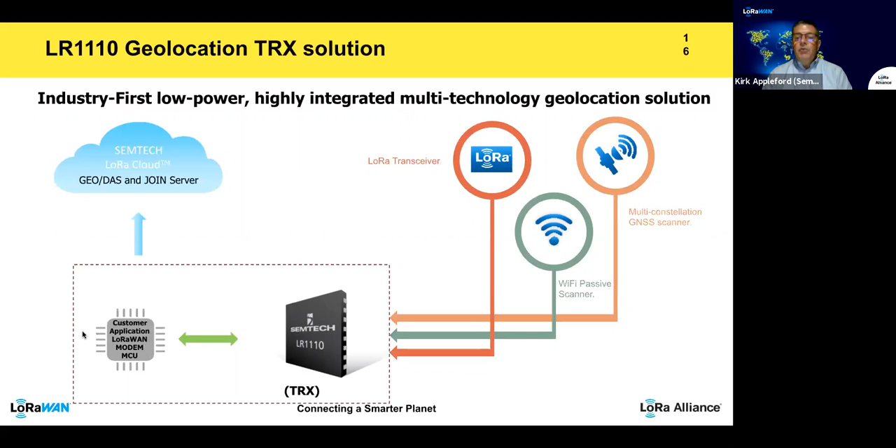So for those of you familiar with large acre cereal farming, where you're using field computers and guidance out in the fields, a lot of you could be using what we call RTK technology, where you're receiving satellite GNSS signals, and then you're also receiving terrestrial GNSS correction signals. So you need a powerful local computer in order to be computing your position in real time all the time. That's really where the power consumption comes from. That's what we've endeavored to solve by moving all the calculations to the cloud.

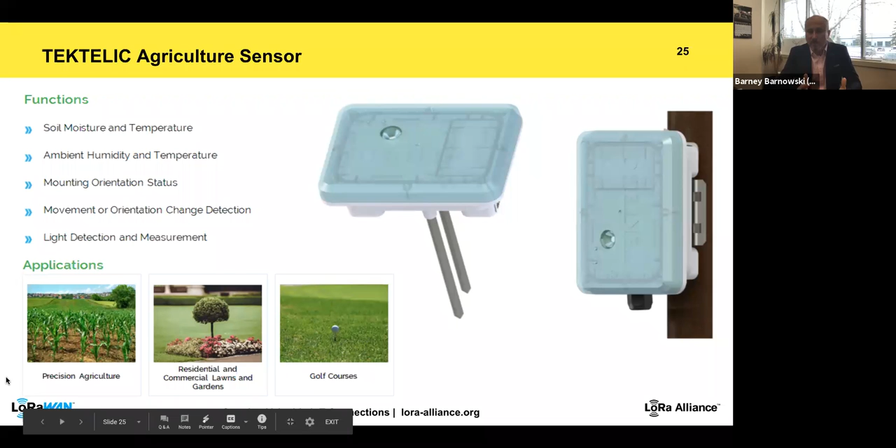So once we have successfully grown our crops, one of the corner cases of agriculture is storage. And when it comes to storage, quite often, because we're dealing with biomass, there is the possibility of decomposition, and by virtue of decomposition, there's a possibility of actual fires.

So we have developed a device that allows us to monitor the temperature of what we call mulch piles, but really it's the ability to monitor any sort of pile of biodegradable material, whether it's grain, banana leaves, or wood chippings. As these things accumulate over time and potentially get moist, there's a possibility that they basically get so hot that they combust.

Here in Alberta, we store grain in big metal storage bins, and every year one or two of these grain bins catches on fire, simply by virtue of the fact that there's been some decomposition occurring in the grain, and the temperature gets so hot that the grain bin catches fire, typically resulting in a loss of $80,000 to $100,000 worth of grain.

So while the use case here is remarkably simple, because all we're monitoring for is the temperature of the grain, it becomes a very powerful and very cost-effective solution to deploy, because the cost benefit just kind of writes itself. Okay, so that's the growing, the monitoring.

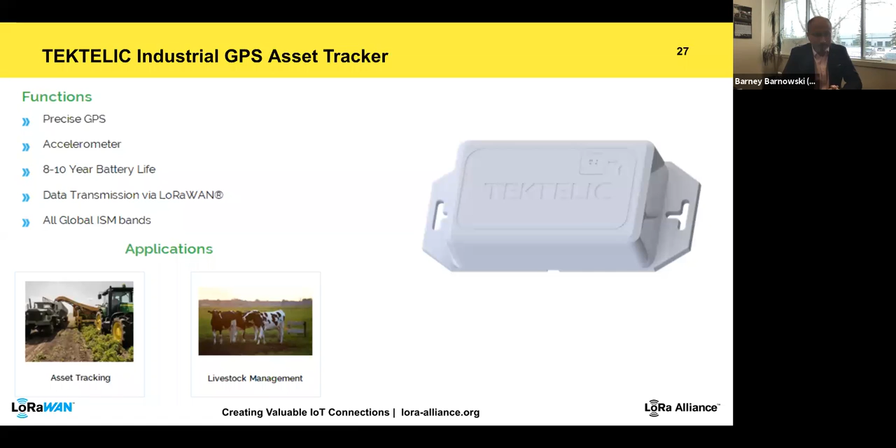So I started with the idea of deploying soil moisture sensors, right? And the soil moisture sensors, typically in the next use case, we can deploy potentially up to hundreds of them in the field.

The question we always get asked is, that's all well and good, I've deployed these for the growing season, but now the growing season is over and I need to pull them out. How do I know where they are? LoRa has a very nice capability, which is time difference of arrival geolocation.

Through the power of triangulation, we can narrow in on the area of where those LoRa devices are, down to 20 meters worth of accuracy. In line of sight areas, which is typically an agricultural type deployment like a growing field, you can get down to as low as 10 meters, which means that once you've deployed these LoRa enabled assets, even though they themselves don't have GPS, you can still find them at the end of the growing season.

You can pull them out of the field in order to plow it or do whatever you need to do to prepare it for the next growing season. This by itself is an extremely powerful capability. If you combine it with other things like the LR1110, you're going to have even more capabilities, and LoRa presents itself as an even better solution for agriculture.

So just wanted to wrap up with one use case. We have lots of use cases, but just wanted to give you a quick example of a tree farm. Again, we have lots of local examples here because there's lots of growing done around Alberta. The province next to ours, there's a hops and cider apple farm where their primary concern was the amount of water they were using and where they were using that water in order to use it as efficiently as possible. So they deployed our sensors, they deployed our gateways. We gave them a very simple application, and they had a very successful growing season. And there's lots of examples like this.

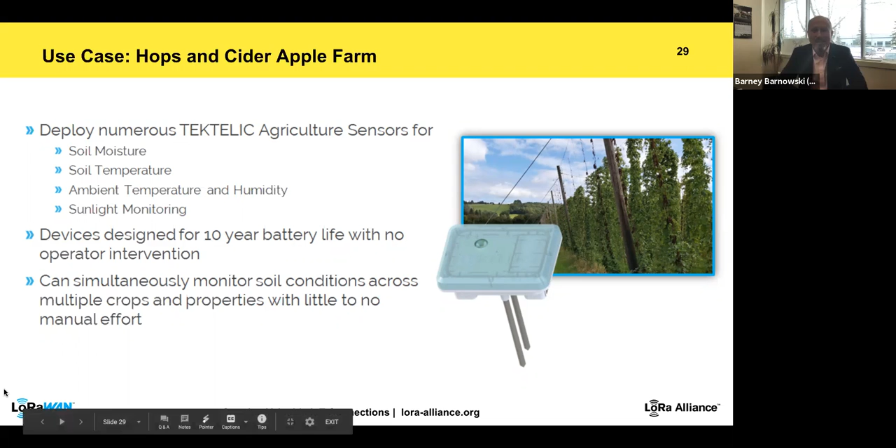Thank you, Julian. And actually, that was a really great segue from Barney and Semtech. So anyway, hello, everybody. I'm Scott Cubis. I'm head of business development and sales in the Americas, other places for OrbiWise SA. We're a Swiss-based company. Our core product is the LoRaWAN network server.

You've heard quite a bit on solutions, which is fantastic. I know everybody wants to hear about that. And we have talked about some of the solutions that with our partners we're doing in Smart Ag. I guess we had a webinar 6 months ago, but wanted to take a slightly different tack with this to talk a little bit more about what you're going to be looking at from a network perspective to use LoRaWAN. And that's not to make it sound like a daunting thing. I think you'll find the technology is very easy to work with. You've got fantastic companies within the Alliance. You've met some, you're going to meet some more here in a minute.

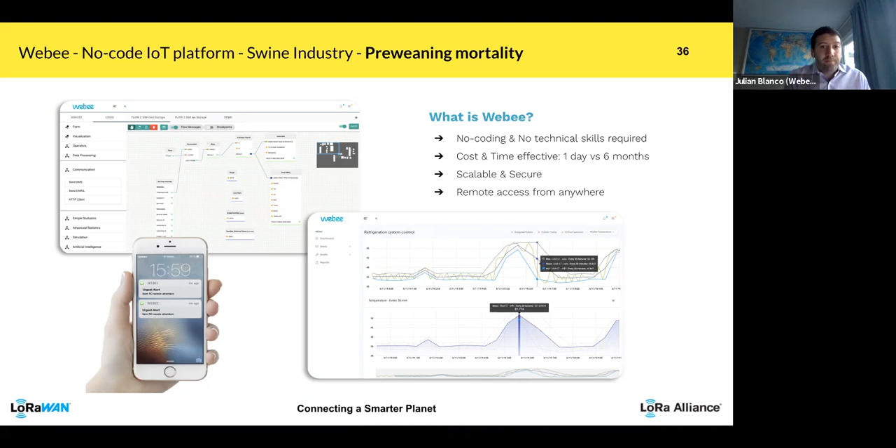Next slide, please. So in this case, we're going to focus on one piece of one solution. Again, we have many other solutions that range from poultry to Industry 4.0. In this case, we chose to focus on the main challenges of the pre-weaning process for pigs in the barns. Again, this is one application—we have many other cases we can discuss and expand on.

Focusing on that particular solution or issue, we see that the mortality rate in the pre-weaning part of the pig production process is between 10 and 20%, and the major cause of those deaths is crushing—that's when the mother sits down or lays down on top of one of the piglets and asphyxiates it to death. That accounts for roughly 70% of those deaths.

The current process to control what's happening in these barn spaces is by having humans running around making sure everything is going fine, and if they hear a piglet squealing, they go fix that situation. That, of course, leads to many human errors, and nobody can be looking at the pigs 24/7, right? It's a very time-consuming process that gives space for multiple issues.

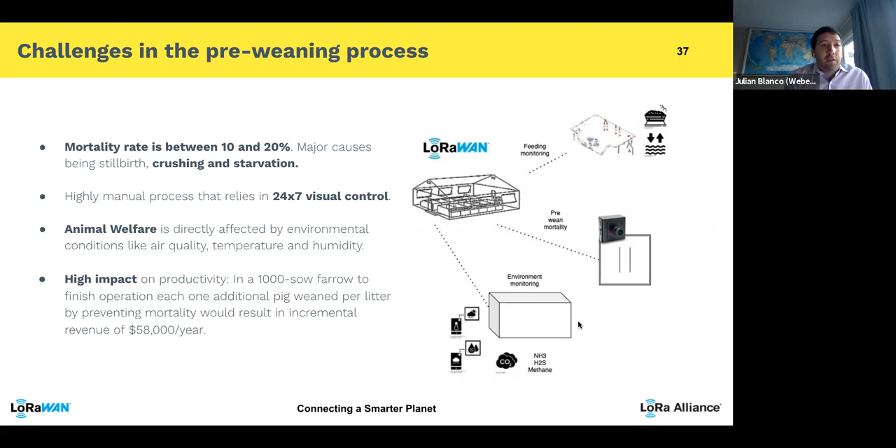Next slide, please. So our approach to these problems, and other problems, is basically: we go in and take data where data is available. In some cases the barns are enabled with PLCs for some data points, so we can integrate with that, extract that data, and manage it in the cloud. Then we add a layer on top with LoRa sensors and actuators that enable us to have full visibility of what's going on, organize the data, and show our customers all the historic information so they can make informed decisions.

In this case, focusing on crushing events, what we offer is a smart camera. The camera is placed above where pig-weaning happens and tracks objects. It can track the movement of the piglets and the mother, and alert us if a piglet is inside the space the mother occupies and there's a crushing event. That alert can trigger a sound alert, a light alert on site, but it can also trigger an SMS alert or an email if required.

So you don't need to rely on a person being there 24/7 watching every single cage. With this kind of built-in intelligence, you can automate part of the process and send the person to the right place, reducing the number of crushing events.

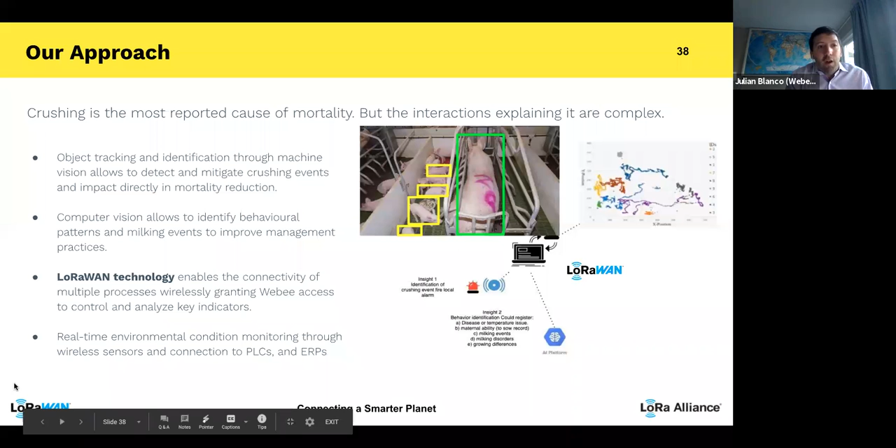We can connect to the ERP, the PLC, or in some cases get that information automatically from the camera. The camera detects, say, 10 pigs, and two days later detects only 8, so we assume 2 pigs were lost in the process. This gives a weekly, accurate view of what's going on.

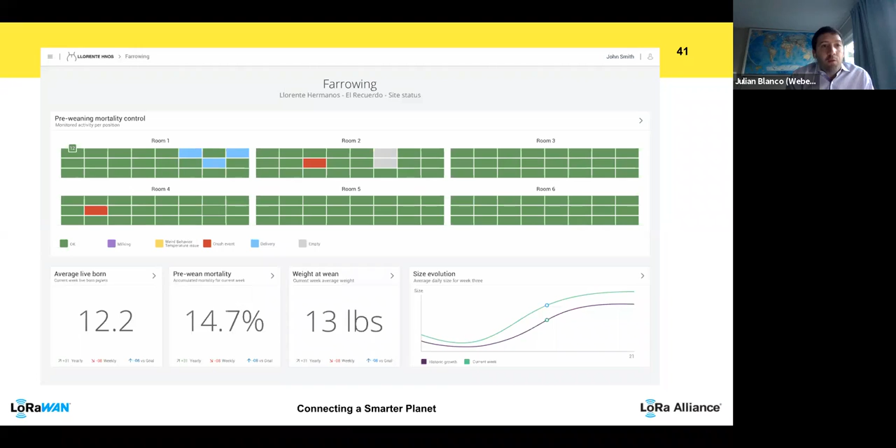milking events. Again, we can track not only crushing, but other types of events that happen with the piglets in the pre-weaning process. Below you have mortality and other data. Again, these dashboards are completely customizable, you can automate them, you can tailor them to fit your exact needs and connect the data that is available. Next slide, please.

So to wrap it up, for this particular example of pre-weaning and crash prevention, we are seeing a reduction of roughly 17% in mortality due to crashing. By implementing this technology, that represents several thousands of dollars saved every year by decreasing the mortality of the animals. Second, we are seeing increases of more than 2% in the optimization of the feeding process by

using the flow meters and level sensors and being able to optimize when and how the animals are fed. The farmer will use that information to make informed decisions in order to increase overall productivity. We can also diminish, or go to zero, critical failure of machinery if we have the right sensors in place, reporting what's going on in real time.

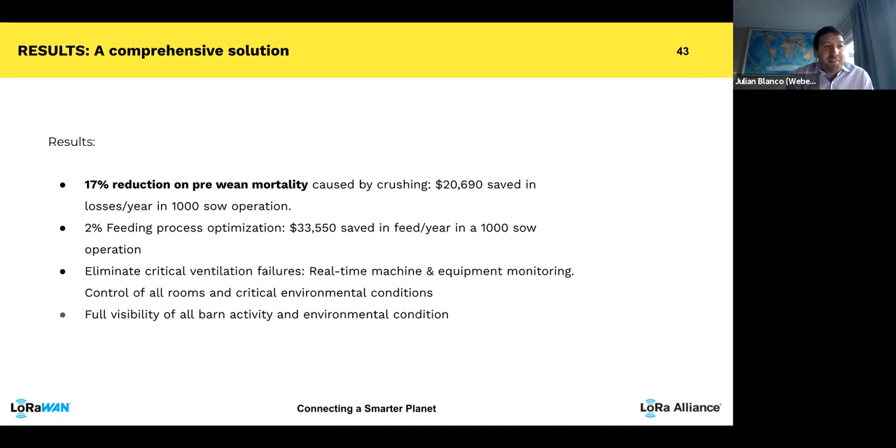Okay, so hi everybody. I am Jose Fernandez, the CEO of AonChip. To present the company, we are a tech company based in Barcelona, Spain. We are dedicated mainly to the design and manufacturing of IoT, Internet of Things, devices to optimize industrial and agricultural processes. So we are specialized in LoRaWAN control devices. We are members of the LoRa Alliance and have devices certified by LoRa Alliance, such as WaterSense, specialized in irrigation control. This is an interesting device that I will try to introduce in the next slides.

Next, please. So, which issue can AonChip solve? The use case that we try to present today is irrigation control, how to do efficient irrigation control.

The issue that we try to solve is that farmers, as my partners have explained in their presentations, dedicate a large part of resources to activities like controlling irrigation. So they have to travel to activate irrigation valves. They spend a lot of time reviewing the correct functionality of the system. And in some cases, when climatic conditions change, they have to change the irrigation according to this climatic condition. So all this is labor cost paid by the owner, and it is money that we want to make more efficient for the owner, winning back this money that is being wasted.

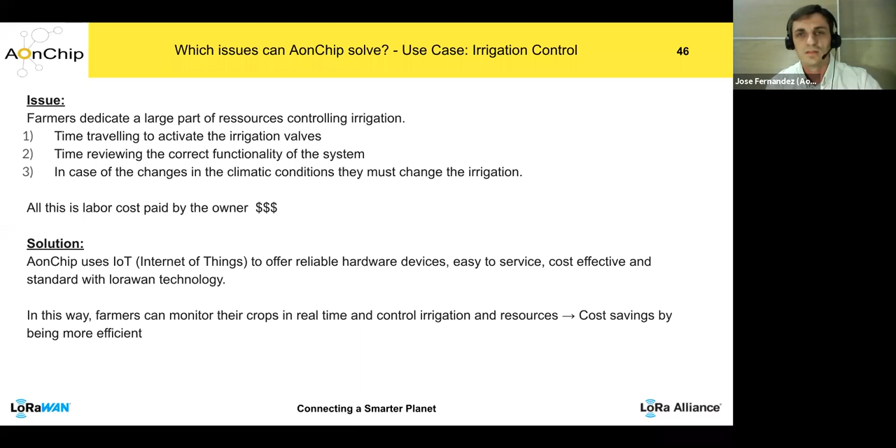So which are the variables that we should measure in the case of how to manage irrigation? As my partner before, Tektelic, has explained, one of the more interesting variables to measure to control irrigation is the temperature and the soil moisture.

We have different solutions to measure the soil, with different levels and different depths. There are multi-level or point measurements, and various measurement methods. It's also interesting how to calibrate the sensor according to the features and according to the soil. The other variables could be the soil water tension and the ground temperature.

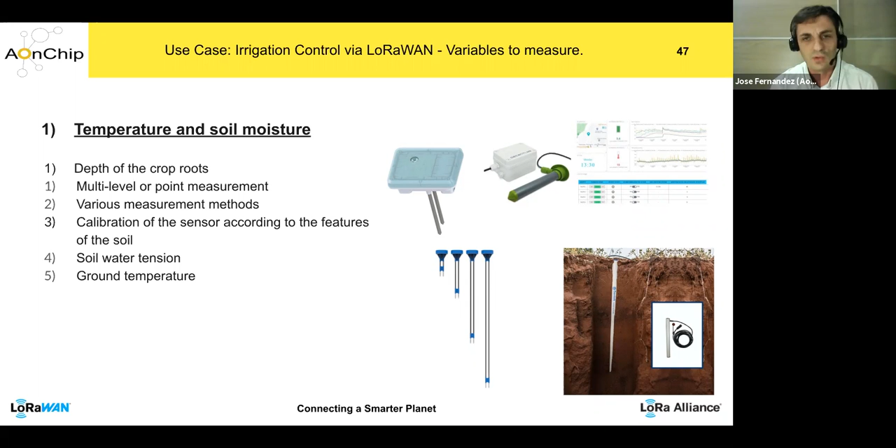Next slide, please. The other interesting thing we should measure is the weather station. The weather station is an instrument that gives us the air temperature, the humidity, the barometric pressure, the solar irradiation, the rain volume, and in some cases also the possibility of frost warning.

Depending on the climate, it's interesting to measure temperature, wind speed, and wind direction. These are all variables that we should identify to efficiently control irrigation in the field. Next slide, please.

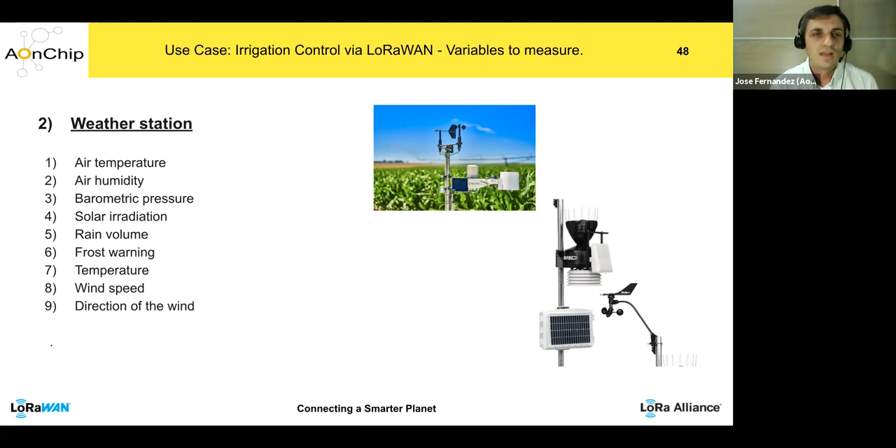The other interesting variable to measure is the water flow consumption. We have cases that we'll explain later with our partner Comesa. It's interesting to measure the consumption of water.

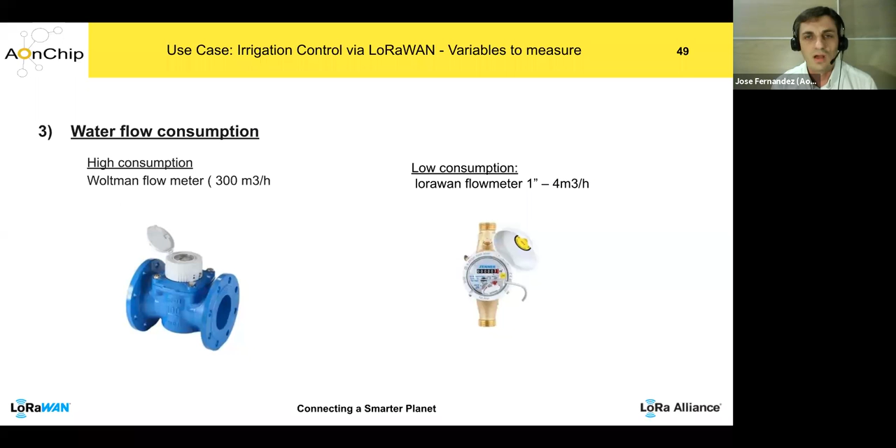In some cases, there are flow meters with high volume, like a kind of flow meter called Woltman, that can handle more than 300 cubic meters per hour. In other cases, we measure low consumption with another kind of LoRaWAN flow meter of 1 inch with a low flow, like 4 cubic meters per hour. Next slide, please.

The idea is to use all these variables we've identified to control irrigation efficiently. The device we're proposing is the WaterSense, a smart water control able to manage up to 4 irrigation outputs with an independent irrigation calendar per output. We can use large valves supplied with 25 volts AC, 205 volts AC, up to 480 volts AC, with a wide range of possibilities.

We are also controlling pumping motors with this device. The other interesting connectivity is the NFC port, used to commission the device through a phone, reducing time for installation and maintenance. Another interesting feature is the battery life, which we warrant for more than 10 years in a device that can actively manage the valve outputs.

So we are looking for cost reduction, avoiding wiring because installation is near the valve and it doesn't need external supply, free of maintenance for 10 years, and a reduction in water consumption. Next slide, please.

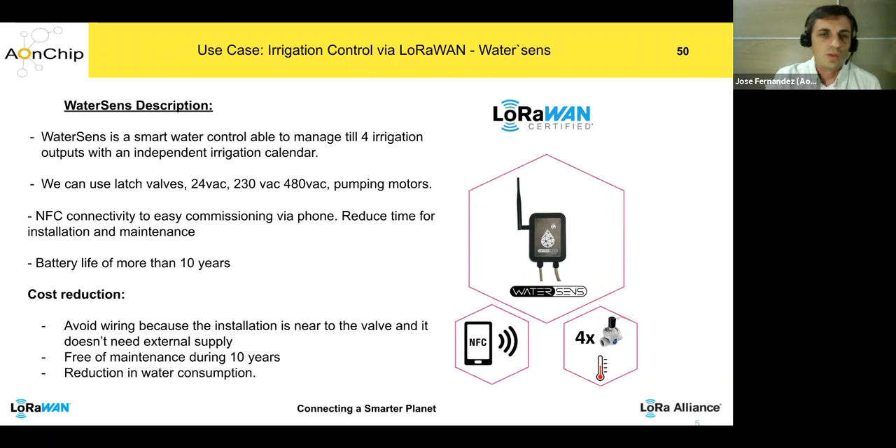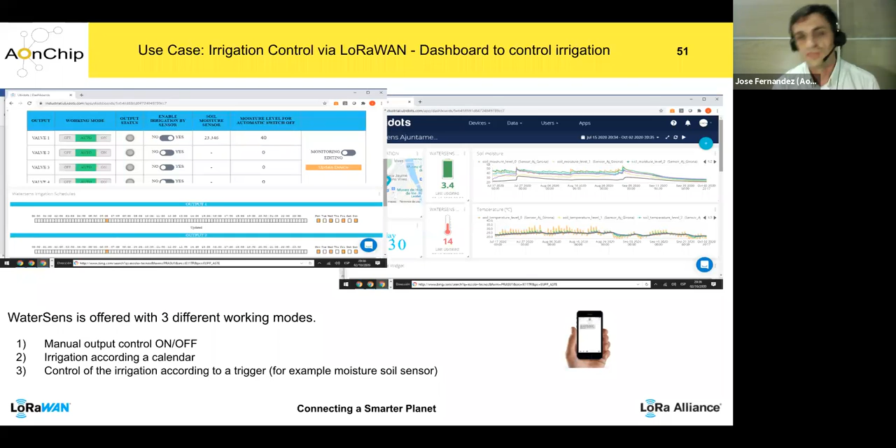We program the trigger according to the value of a soil sensor assigned to each output. If the trigger has not reached this value, the activation works; if the trigger has reached this value from the soil sensor, the activator is inhibited. Next slide, please.

These are examples of how we're using WaterSens. For example, number 1, we have connected latch valves with low pressure in drip irrigation, directly near the valve box. Here we have two large valves with a device. In the other slide, we have irrigation controlling in the field of olive trees in Seville, Spain. Next slide, please.

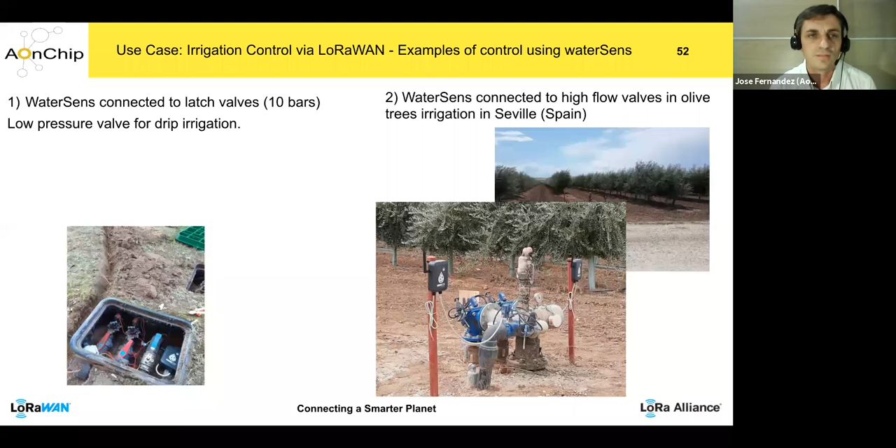This is another example of how we are using it: we are controlling solar pumping with our device. This is typically for areas without electricity. We are using WaterSens to activate the solar pumping according to the value of a soil sensor. Next slide, please.

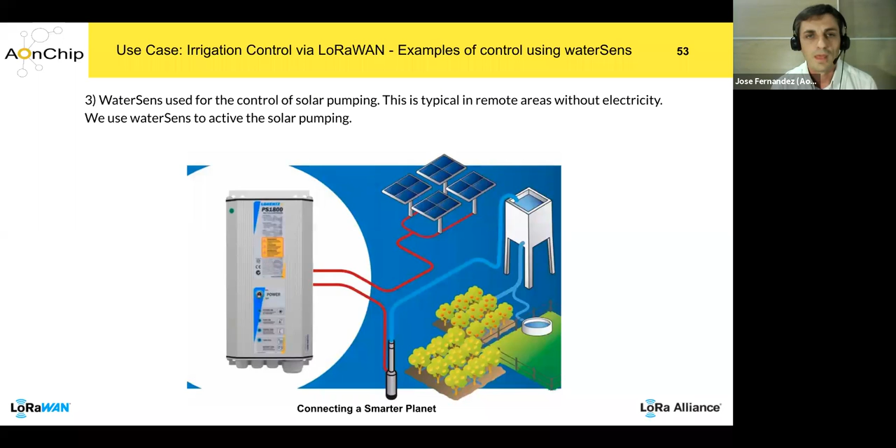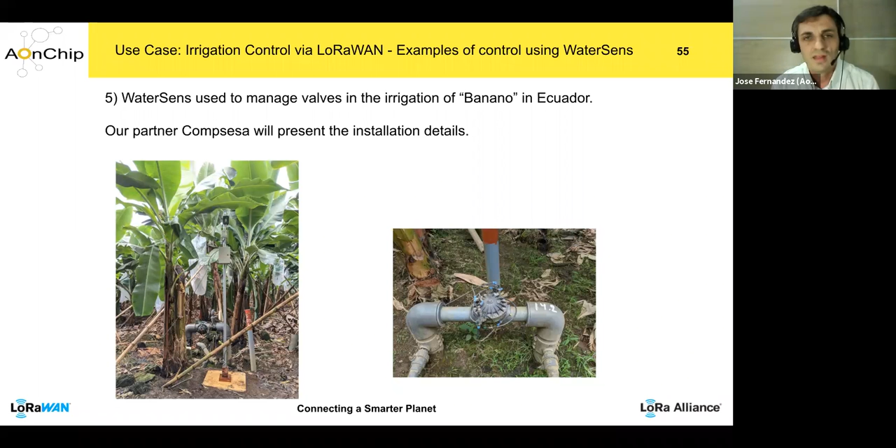And this is the final use case that my partner Patrick from Compsesa in Ecuador is going to present. It's a very interesting use case that we have been deploying in managing the irrigation in banana.

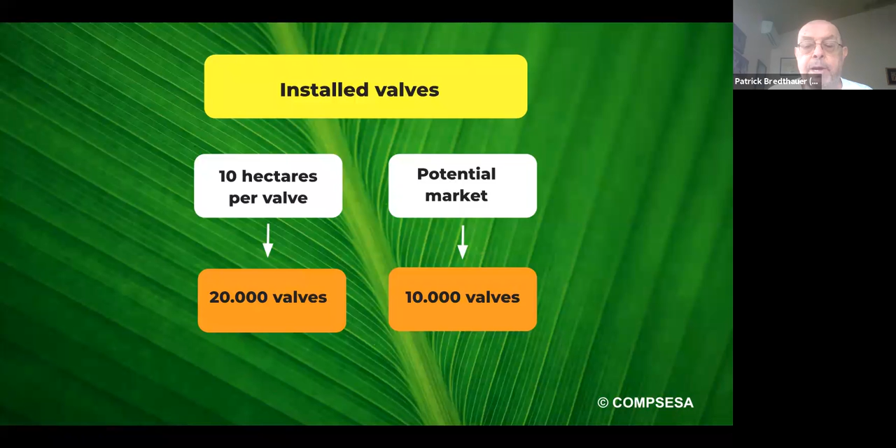So the first thing we did, because this technology is new to the market, was introduce the gateway to the farms at our cost. We installed it, we made the test, we tested the coverage of the farm to be able to convince the owners that this is a technology which can be applied for many types of applications.

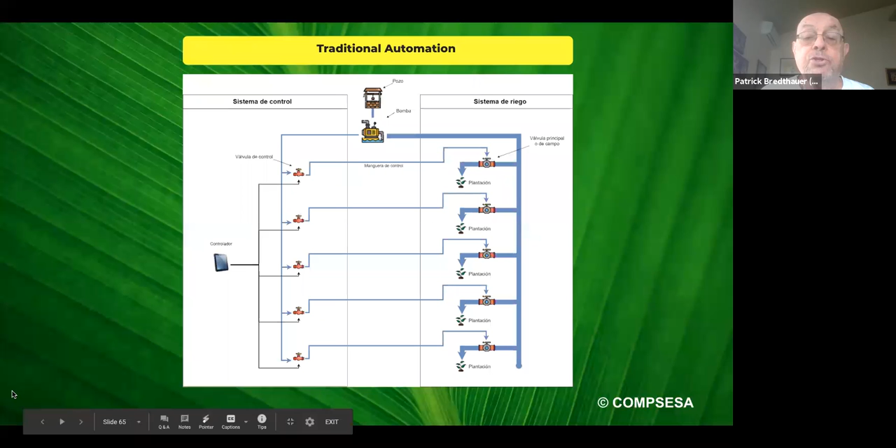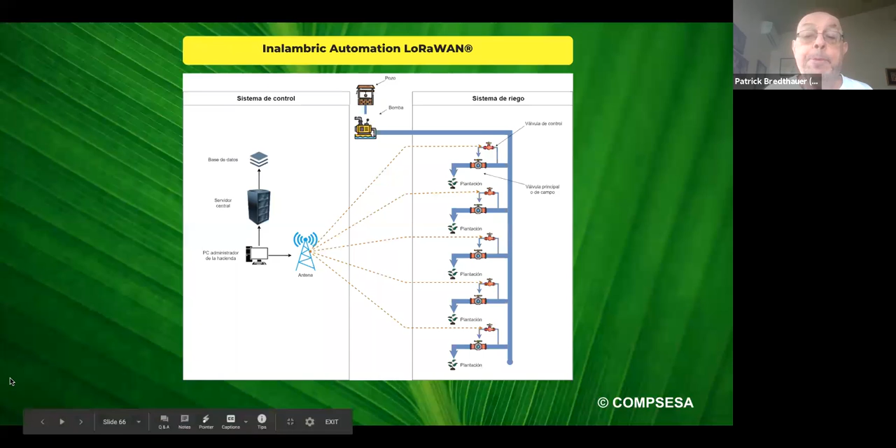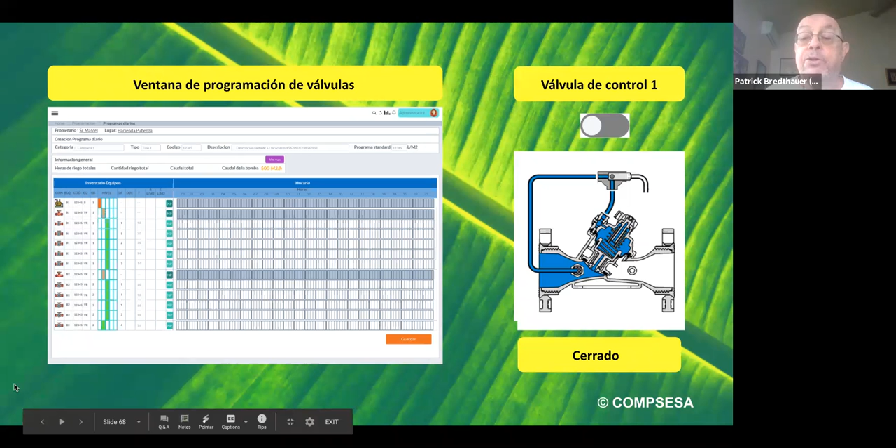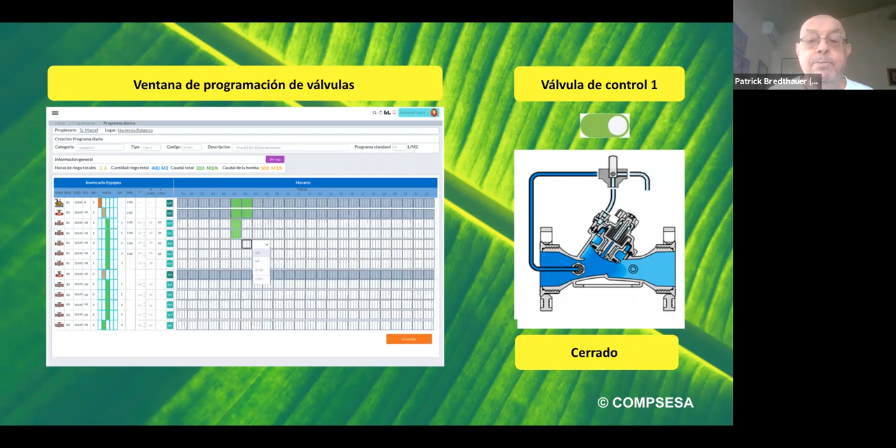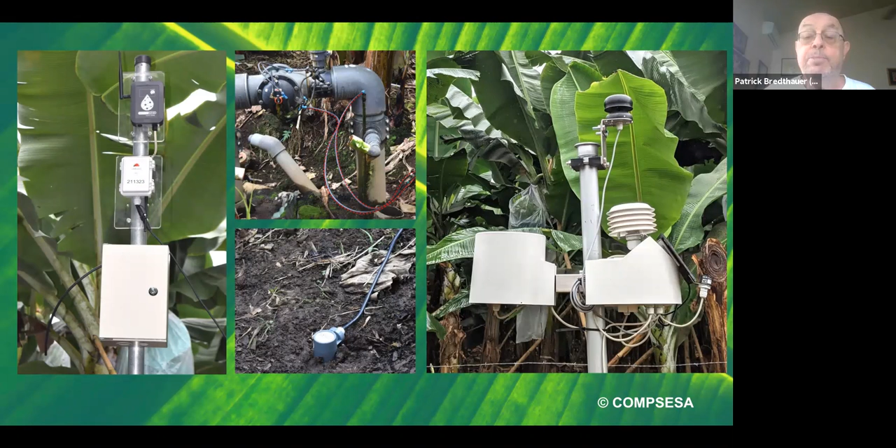We have a lower investment cost. We have security that the work is really done, and we have very good profitability. Can we see the next slide?

So the hydraulic valve cost, which would have to be invested for this manual operation, would be about $500. And what we calculated is with the labor - these are not all the detailed data, they're very summarized - the savings are about $22,000. The investment we have in the first year is $15,200, which includes all these valves. And the payback we've calculated is 8 months.